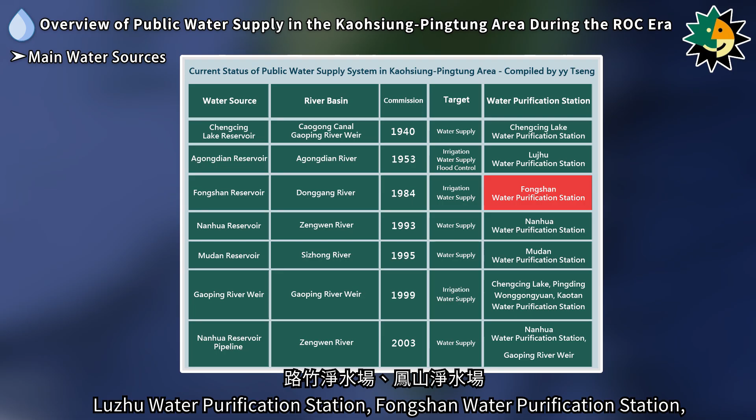The main water sources for water purification stations in the Kaohsiung area come from Chengcing Lake Reservoir, Agongdian Reservoir, Fongshan Reservoir, Nanhua Reservoir, and the Gaoping River Weir. These sources provide raw water to Chengcing Lake Water Purification Station, Lujhu Water Purification Station, Fongshan Water Purification Station, Pingding Water Purification Station, Wonggongyuan Water Purification Station, and Kaotan Water Purification Station to supply municipal and industrial water for the Kaohsiung area.

In the Pingtung area, public water supply in northern Pingtung is mainly provided by the Pingtung Water Purification Station, which utilizes groundwater to meet the water needs of the region. In southern Pingtung, the Mudan Water Purification Station, using both Mudan Reservoir and groundwater, supplies the water demands of the southern region.

Additionally, due to the significant rainfall differences between the wet and dry seasons in southern Taiwan, a pipeline connecting the Nanhua Reservoir and the Gaoping River Weir was completed in 2003 to stabilize water supply from the weir, with a designed supply capacity of 800,000 cubic meters per day.

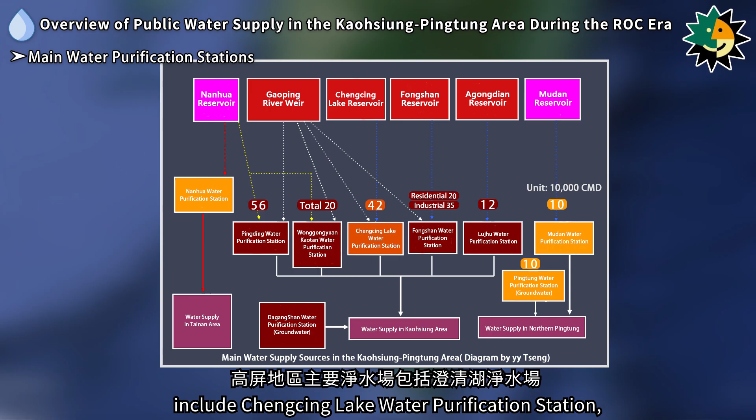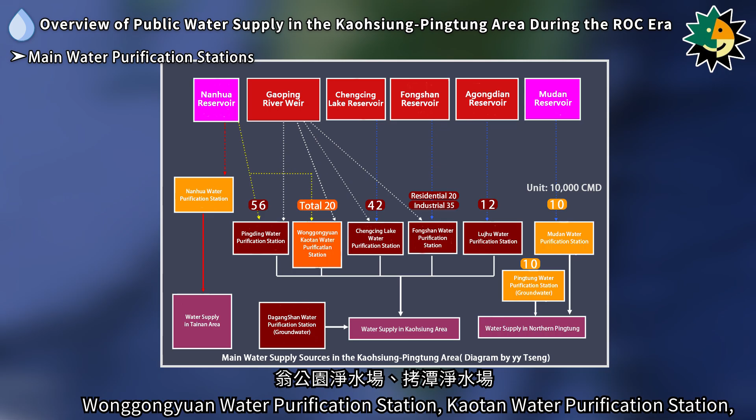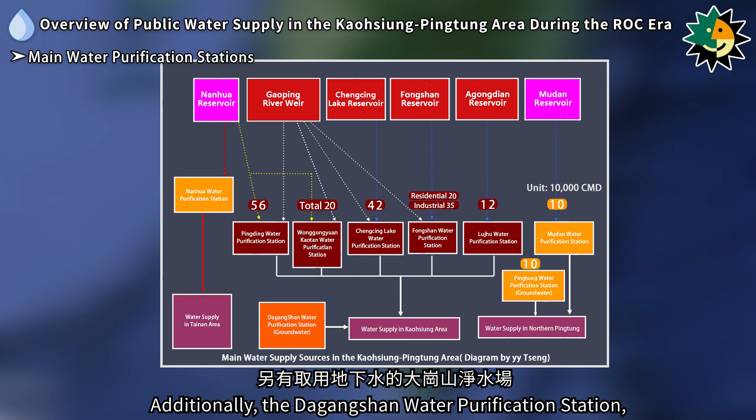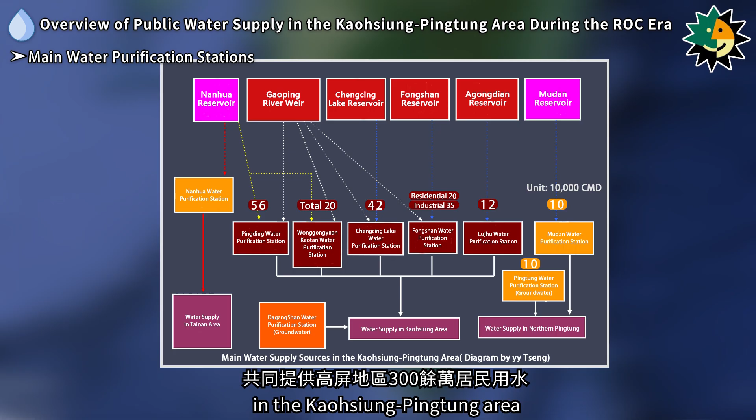The main water purification stations in the Kaohsiung-Pingtung area include Chengcing Lake Water Purification Station, Lujhu Water Purification Station, Fongshan Water Purification Station, Pingding Water Purification Station, Wonggongyuan Water Purification Station, Kaotan Water Purification Station, Mudan Water Purification Station, and Pingtung Water Purification Station. Additionally, the Dagangshan Water Purification Station, which uses groundwater, also contributes to supplying water to more than 3 million residents in the Kaohsiung-Pingtung area. Kaohsiung alone has a water-consuming population of approximately 2.6 million people.

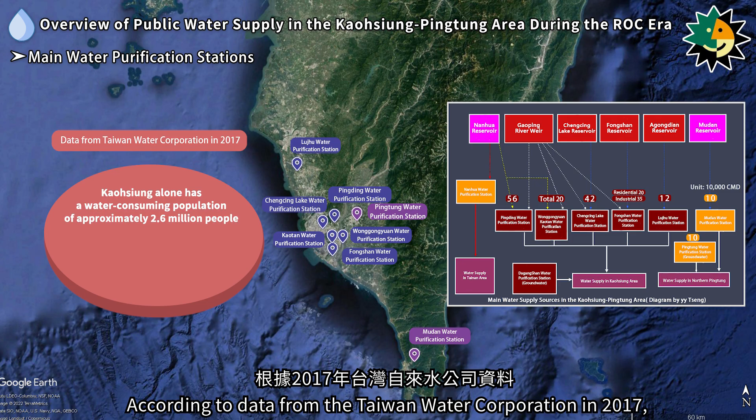According to data from the Taiwan Water Corporation in 2017, the total output of the Kaohsiung water supply system was about 1.99 million cubic meters per day, including 560,000 cubic meters per day from Pingding Water Purification Station, 420,000 cubic meters per day from Chengcing Lake Water Purification Station, 200,000 cubic meters per day for municipal water, and 350,000 cubic meters per day for industrial water from Fongshan Water Purification Station,

170,000 cubic meters per day from Kaotan Water Purification Station, 120,000 cubic meters per day from Lujhu Water Purification Station, 30,000 cubic meters per day from Wonggongyuan Water Purification Station, and 140,000 cubic meters per day from other stations.

In the Pingtung area, which has a population of about 600,000 people, the total output of the water supply system is approximately 200,000 cubic meters per day. The Pingtung Water Purification Station provides 100,000 cubic meters per day from groundwater, while the Mudan Water Purification Station provides another 100,000 cubic meters per day from Mudan Reservoir and groundwater.

Chengcing Lake, originally named Dapi, is located in Niaosong District, Kaohsiung City. During the Japanese colonial period, water was drawn from the Gaoping River, and through the Caogong Canal, it was diverted into Chengcing Lake Reservoir to supply industrial water to the Sishihjia area of Kaohsiung. The daily water output was less than 10,000 cubic meters per day.

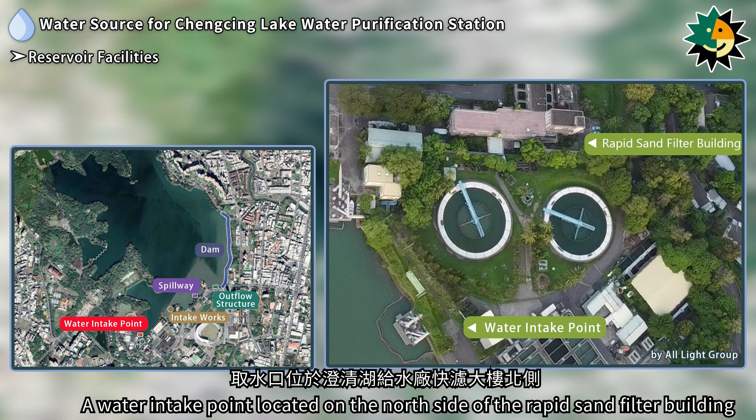The main facilities of Chengcing Lake Reservoir include an earthen dam with a crest height of 19 meters, a free overflow spillway with a maximum discharge capacity of 7.7 cubic meters per second, a water intake point located on the north side of the rapid sand filter building at the Chengcing Lake Water Treatment Plant, drawing water through a 0.6 meter diameter pipeline to the purification station.

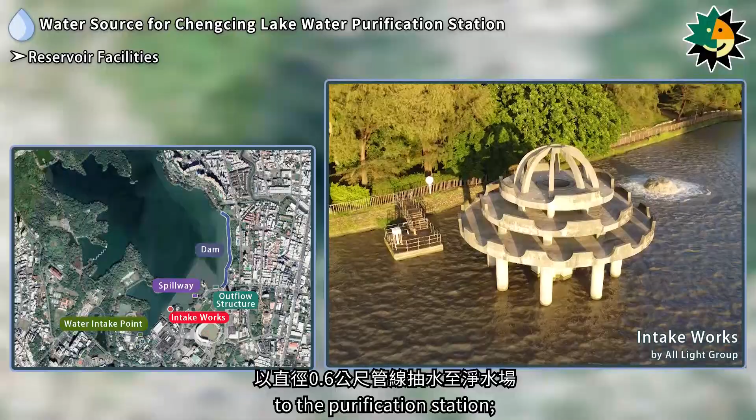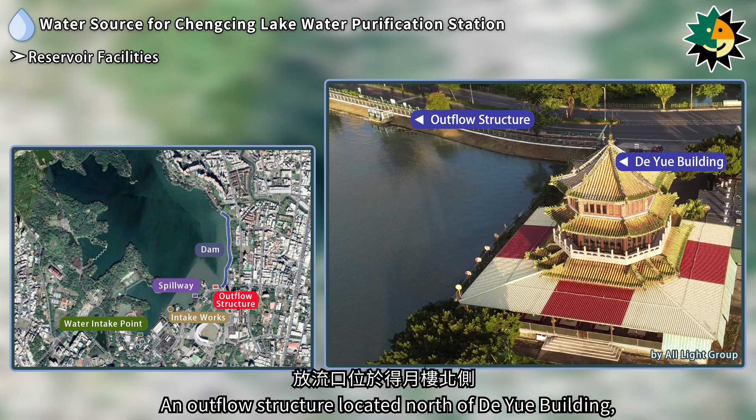Intake works on the north side of the Advanced Water Purification Plant, drawing water from the Gaoping River Weir. An outflow structure located north of De Yue Building, equipped with a lift gate, with a maximum discharge capacity of 11.56 cubic meters per second.

Chengcing Lake enjoys excellent natural conditions and well-maintained soil and water conservation. Its picturesque scenery of lakes and mountains has attracted tourists since 1955, earning it the reputation of being Taiwan's premier scenic spot.

The Chengcing Lake Water Purification Station, located in Niaosong District, was originally established to meet the demand for industrial water during the Japanese colonial period. It was known as the Kaohsiung Industrial Water Treatment Plant, the first water plant in Taiwan specifically set up for industrial water supply. After the war, it was renamed the Kaohsiung Industrial Water Supply Engineering Office in 1947, and its machinery was repaired to resume water supply.

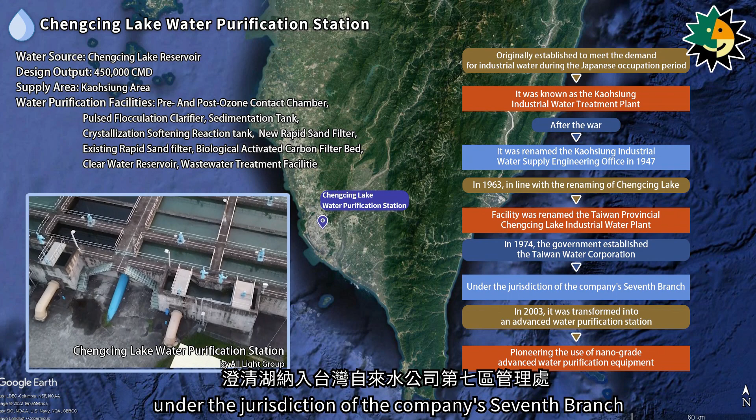In 1963, in line with the renaming of Chengcing Lake, the facility was renamed the Taiwan Provincial Chengcing Lake Industrial Water Plant. In 1974, the government established the Taiwan Water Corporation, and Chengcing Lake was placed under the jurisdiction of the company's 7th branch.

In 2003, it was transformed into an advanced water purification plant, pioneering the use of nano-grade advanced water purification equipment. The water source is drawn from the Gaoping River Weir, with water pumped into Chengcing Lake Reservoir. The station has a designed output of 450,000 cubic meters per day.

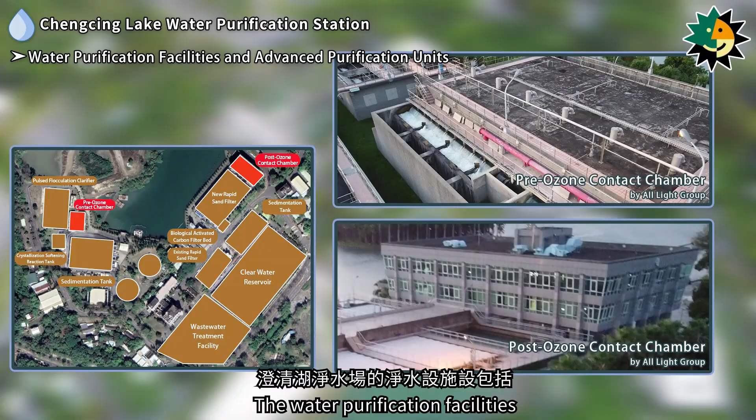The water purification facilities at Chengcing Lake Water Purification Station include pre- and post-ozone contact chambers, pulsed flocculation clarifier, sedimentation tanks, crystallization softening reaction tanks, new rapid sand filters, existing rapid sand filters, biological activated carbon filter beds, clear water reservoirs, and wastewater treatment facilities.

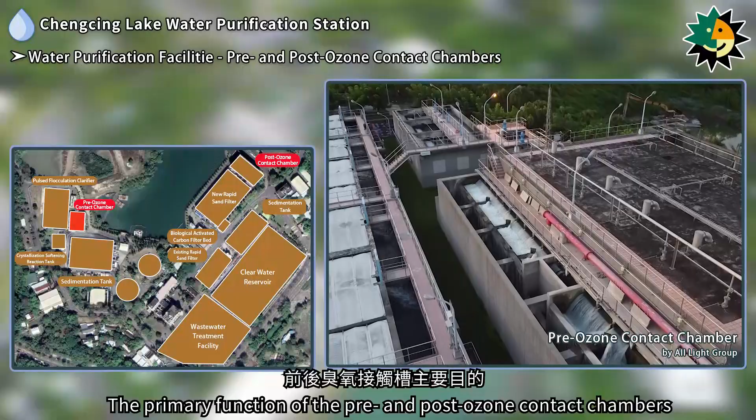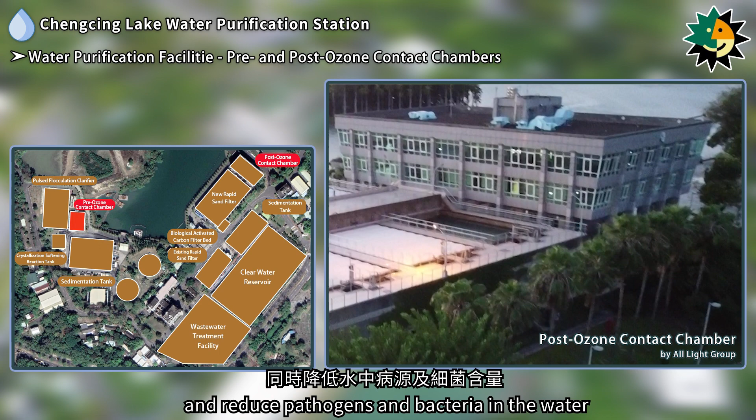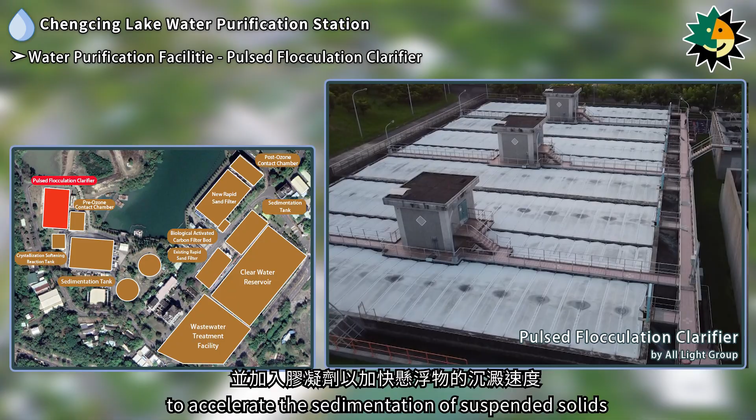The primary function of the pre- and post-ozone contact chambers is to oxidize and remove manganese from the water, inhibit the growth of algae, enhance and improve sedimentation rates, and reduce pathogens and bacteria in the water. The newly installed pulsed flocculation clarifier uses gravity to slowly settle suspended solids in the raw water. Coagulants are added to accelerate the sedimentation of suspended solids.

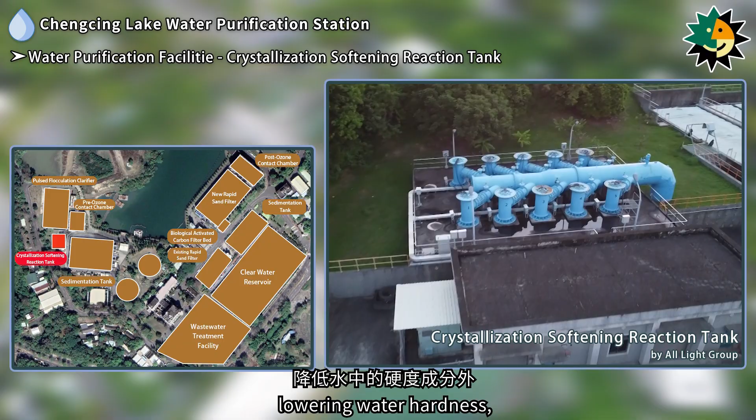The crystallization softening reaction tank reduces the hardness of tap water by removing calcium and magnesium, lowering water hardness, reducing equipment wear during heating, and enhancing the effectiveness of detergents, thereby reducing detergent use.

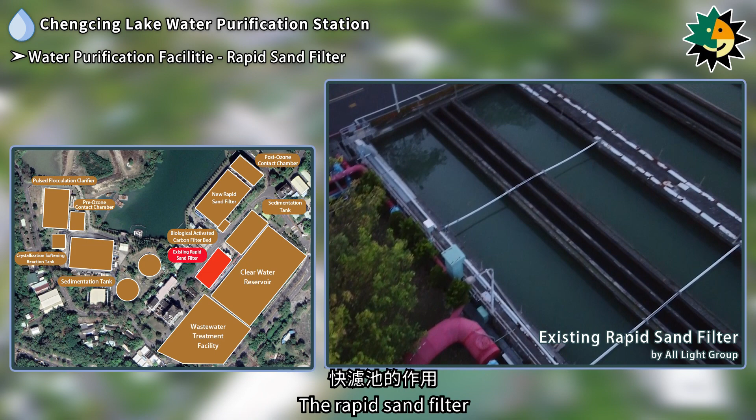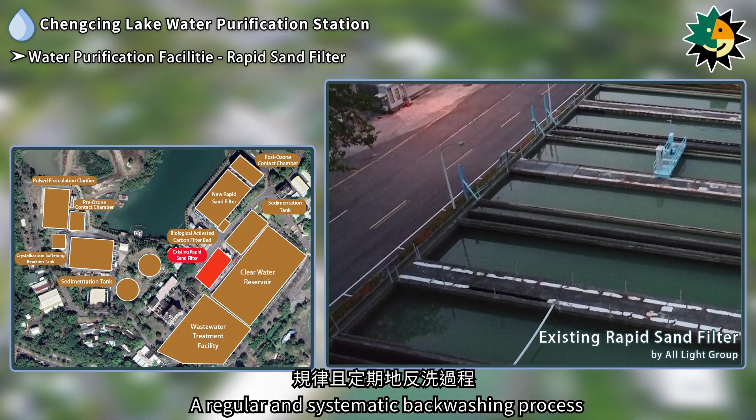The rapid sand filter removes suspended particles from the water. The principle involves using filter materials within the tank, which consist of layers of anthracite and quartz sand. A regular and systematic backwashing process removes suspended particles from the water. The biological activated carbon filter bed is mainly used to remove residual pesticides, reduce carcinogenic substances, and eliminate microscopic bacteria from the water.

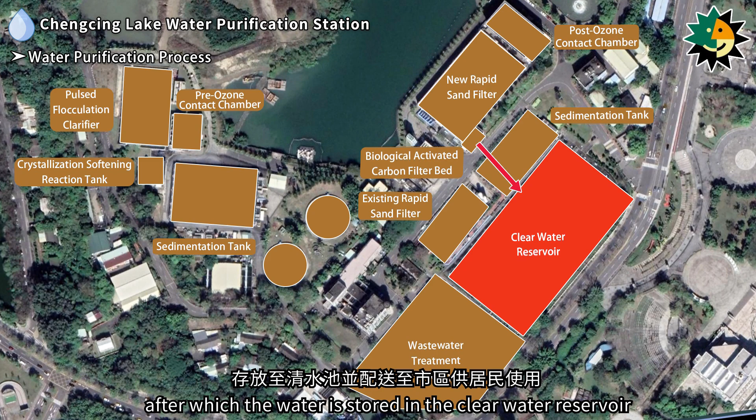The water purification process at Chengcing Lake Water Purification Station starts with drawing water from Chengcing Lake. After passing through the pre-ozone contact chamber, the water enters the flocculation clarifier and crystallization softening reaction tank to clarify the water. The clarified water is then sent to the rapid sand filters for filtration. Finally, residual materials in the water are removed by the biological activated carbon filter bed, after which the water is stored in the clear water reservoir and distributed to urban areas for public use. Chengcing Lake Water Purification Station primarily supplies public water to the greater Kaohsiung area.

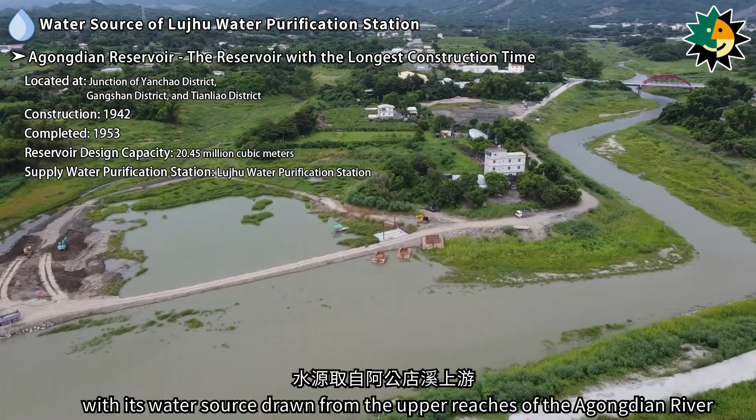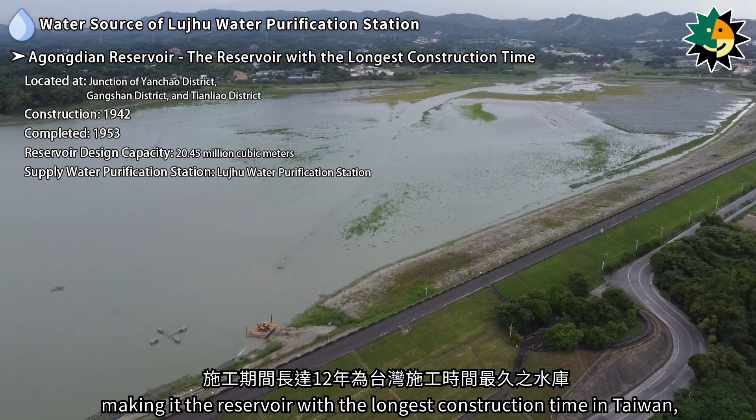Agongdian Reservoir is located at the junction of Yanchao District, Gangshan District, and Tianliao District in Kaohsiung City, with its water source drawn from the upper reaches of the Agongdian River. Construction began during the Japanese colonial period in 1942 and was completed in 1953, making it the reservoir with the longest construction time in Taiwan, spanning 12 years.

Agongdian Reservoir is also Taiwan's only multi-purpose reservoir that prioritizes flood control while also serving agricultural irrigation and public water supply. The designed water intake capacity of Agongdian Reservoir for public water supply is 20.45 million cubic meters. However, due to severe siltation and pollution in the watershed, the reservoir temporarily ceased public water supply. In late 2005, water storage was restored, and the reservoir was reopened in June 2006, with its main function being to provide water for the Lujhu Water Purification Station.

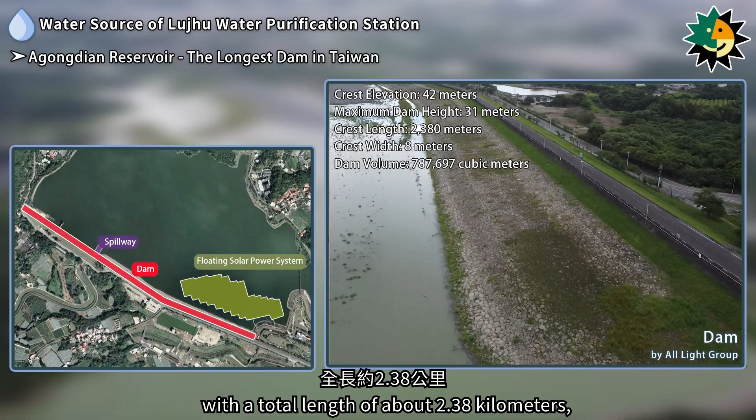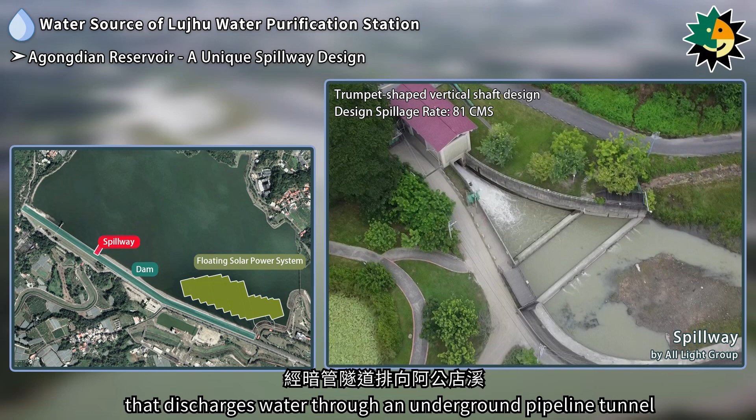The dam of Agongdian Reservoir is a rolled-fill earthen dam with a total length of about 2.38 kilometers, once the longest in the Far East, and remains the longest dam in Taiwan. The spillway of Agongdian Reservoir features a trumpet-shaped vertical shaft design, with the spillway utilizing a patio-type vortex outlet that discharges water through an underground pipeline tunnel to the Agongdian River. The distinctive trumpet-shaped structure protruding from the water is a notable feature. To align with the government's 2025 nuclear-free homeland energy policy, a floating solar power system has been installed in the reservoir area of Agongdian Reservoir.

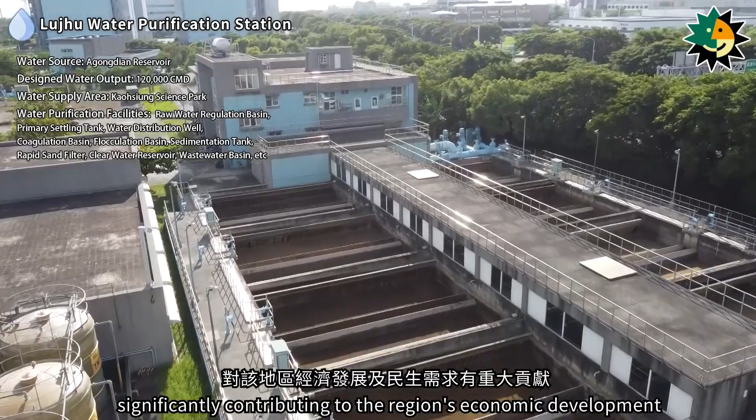The Lujhu Water Purification Station was constructed in 2008, drawing its water source from the Agongdian Reservoir, with a designed output capacity of 120,000 cubic meters per day. The station primarily addresses the water needs of the Kaohsiung Science Park of the Southern Taiwan Science Park. When there is surplus water, it is coordinated with excess water from the Nanhua Reservoir to meet the municipal water demands of nearby townships. The Lujhu Water Purification Station is one of the most important stations in northern Kaohsiung, significantly contributing to the region's economic development and meeting public water needs.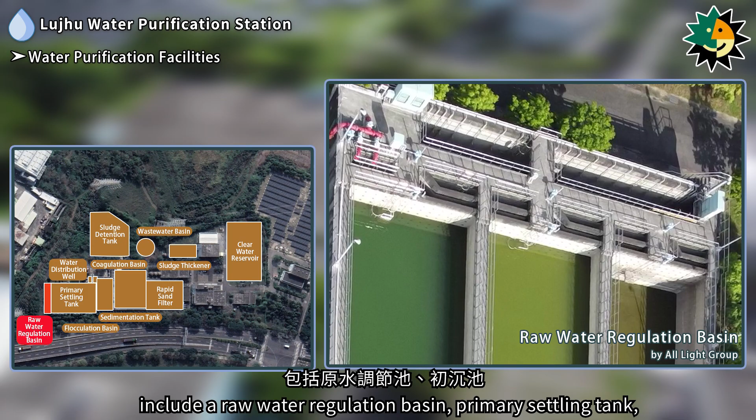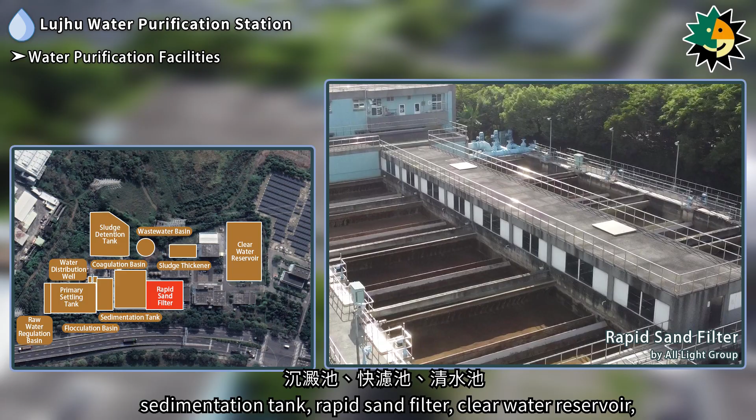The water purification facilities at Lujhu Water Purification Station include a raw water regulation basin, primary settling tank, water distribution well, coagulation basin, flocculation basin, sedimentation tank, rapid sand filter, clear water reservoir, wastewater basin, sludge thickener, and sludge detention tank.

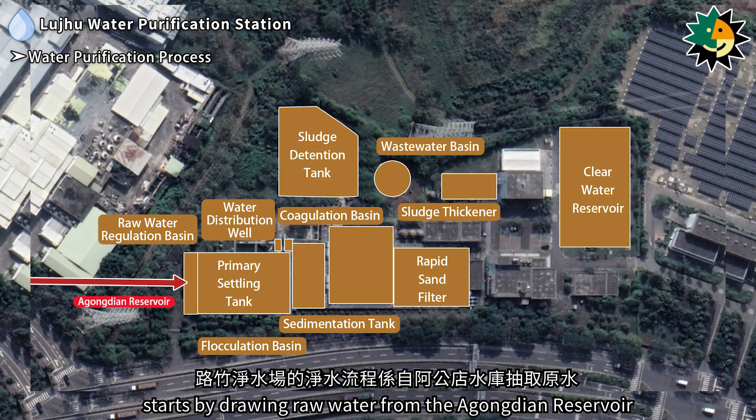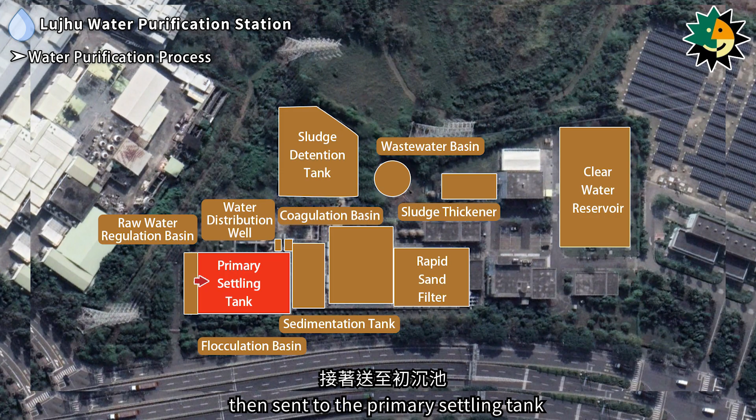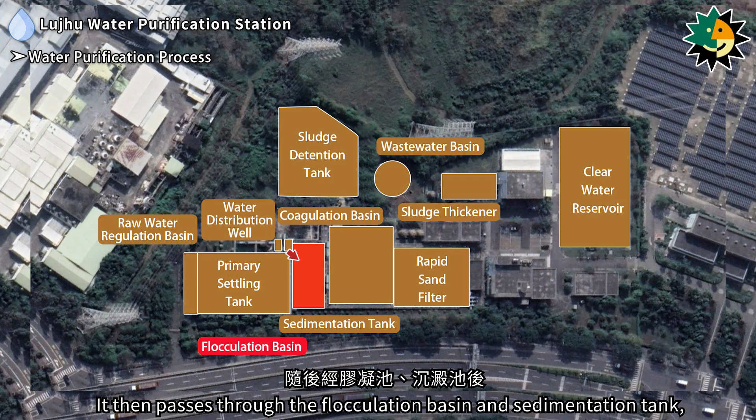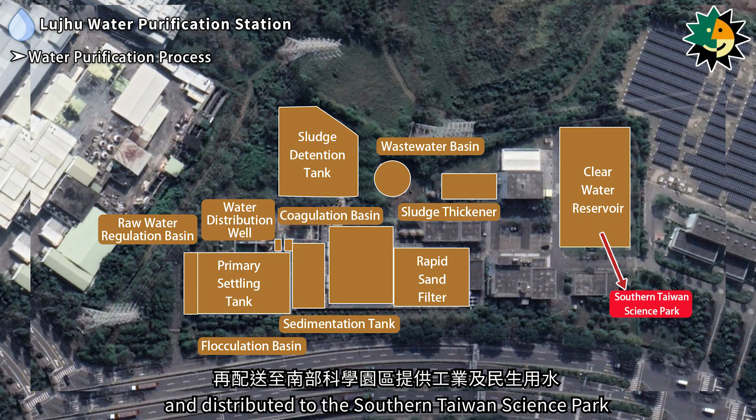The water purification process at Lujhu Water Purification Station starts by drawing raw water from the Agongdian Reservoir. The water is conveyed through pipelines to the raw water regulation basin at the station for regulation, then sent to the primary settling tank. After sedimentation, the water is directed through the water distribution well to the coagulation basin for treatment. It then passes through the flocculation basin and sedimentation tank, followed by filtration through the rapid sand filter. The purified water is stored in the clear water reservoir and distributed to the Southern Taiwan Science Park to provide both industrial and municipal water.

In the early stages, the water source for municipal use at Fongshan Water Purification Station came from the Gaoping River, with water drawn from the Gaoping River Weir pumping station and sent to the Fongshan Water Purification Station via the Zhaoming Pumping Station.

The Fongshan Reservoir is the most important source of industrial water supply for the greater Kaohsiung area. It was completed and opened in June 1982. Approximately 3/4 of the reservoir is located in Xiaogang District, Kaohsiung City, with the remainder in Linyuan District, and the main gate located in Daliao District.

The dam site is located at the southeastern foothills of the Fongshan Hills, at the junction of Xiaogang, Linyuan, and Daliao districts in Linyai village. The reservoir is named after Fongshan due to its location. It is an off-stream reservoir with water sources from Donggang River and Gaoping River through Trans-Basin Water Diversion.

The reservoir covers an area of 74.9 hectares, with a storage capacity of 8.7 million cubic meters, primarily providing water for the Fongshan Water Purification Station.

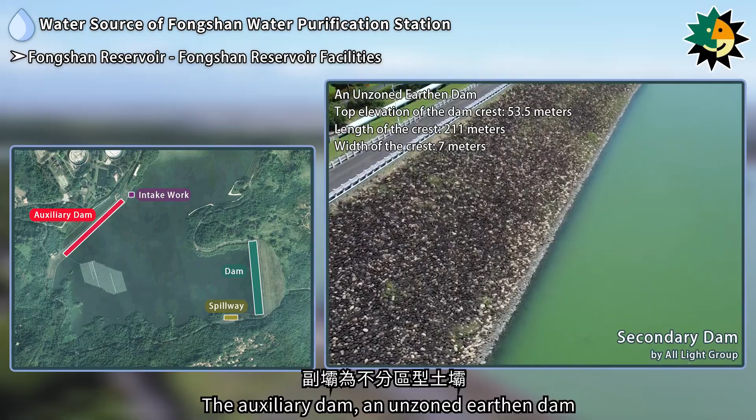The main facilities of Fongshan Reservoir include the Donggang River Weir, which is a floating overflow weir, the main dam, which is a layered rolled fill and zoned earthen dam, the auxiliary dam, an unzoned earthen dam, the spillway, which is a side channel overflow type without gates, and the intake works, which uses a nearshore inclined chute type sliding gate.

Fongshan Water Purification Station was constructed in 1977 in 2 phases. The first phase, the Municipal Water Treatment System, began construction in October 1977 and was completed in May 1980. The second phase, the Industrial Water Treatment System, was completed in June 1985, and advanced water purification processes were added in 2004.

Due to the instability of the Gaoping River's water, Donggang River was originally used only for industrial water supply. In 2014, a pre-treatment project was implemented for Donggang River's raw water, creating biological filters to purify ammonia, nitrogen, and organic materials in the water.

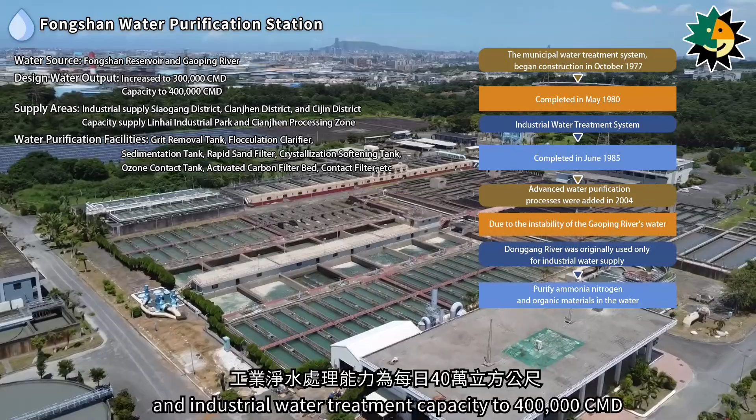After treatment, the raw water is further purified at the water purification station and can then be supplied as municipal water. After the expansion of the Fongshan Water Purification Station, its capacity for municipal water treatment increased to 300,000 cubic meters per day, and industrial water treatment capacity to 400,000 cubic meters per day.

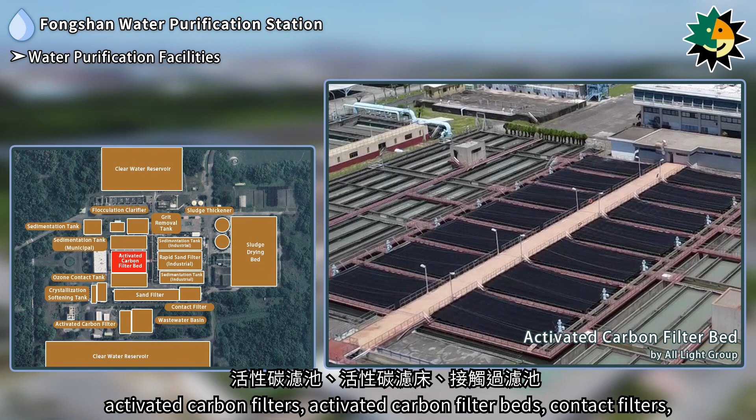The water purification facilities at Fongshan Water Purification Station include grit removal tanks, flocculation clarifiers, sedimentation tanks, rapid sand filters, crystallization softening tanks, ozone contact tanks, activated carbon filters, activated carbon filter beds, contact filters, clear water reservoirs, sand filters, wastewater basins, sludge thickeners, and sludge drying beds.

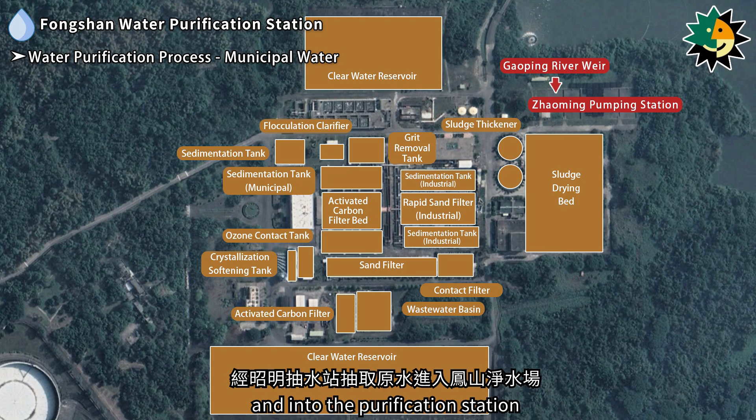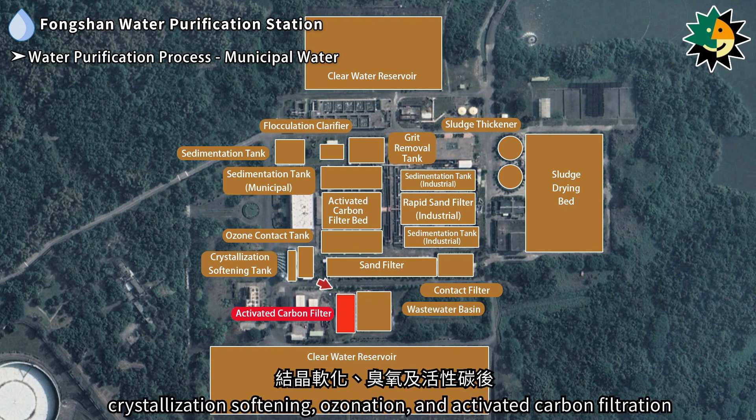The municipal water purification process at Fongshan Water Purification Station involves drawing raw water from the Gaoping River Weir, which is pumped through the Zhaoming Pumping Station and into the purification station. The water undergoes grit removal, flocculation and sedimentation, crystallization softening, ozonation, and activated carbon filtration. After chlorination, the water is stored in the Clear Water Reservoir and distributed to Siaogang District, Cianjhen District, and Cijin District for residential use.

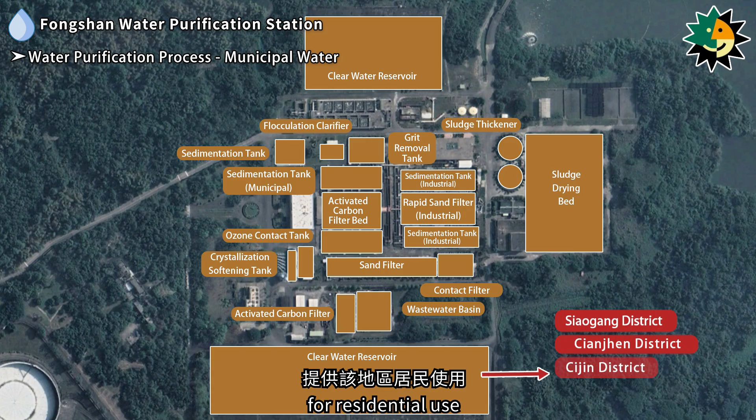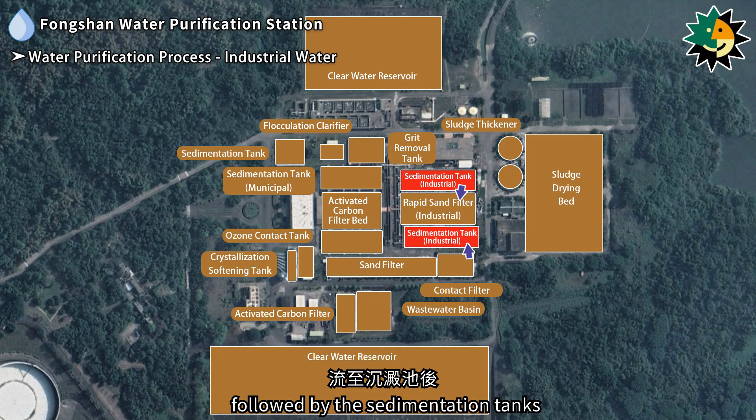The industrial water purification process at Fongshan Water Purification Station starts with raw industrial water sourced from the Donggang River. The water is first stored in Fongshan Reservoir and then pumped to the contact filters, followed by the sedimentation tanks. After being filtered through the rapid sand filters, the purified water is stored in the Clear Water Reservoir. The water is then distributed by gravity to the Linhai Industrial Park and Cianjhen Processing Zone to meet the industrial water needs of these areas.

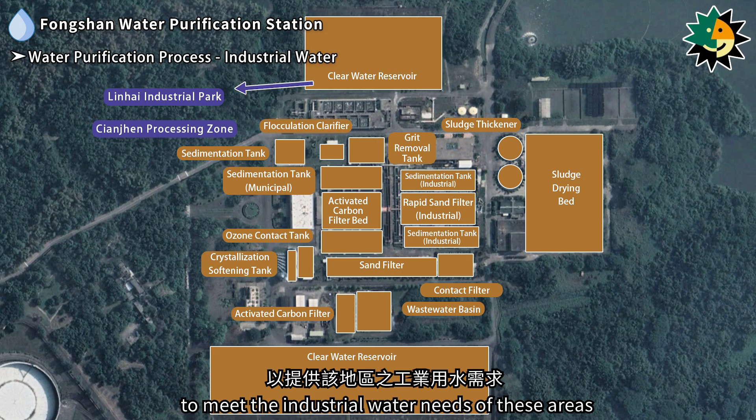The public water supply in the Kaohsiung area is primarily sourced from Chengcing Lake Reservoir, Agongdian Reservoir, Fongshan Reservoir, the Gaoping River Weir, and Nanhua Reservoir.

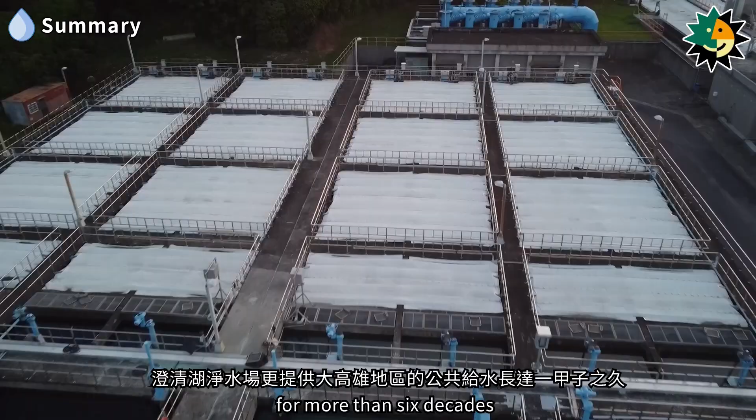Since the completion of Chengcing Lake, not only has its picturesque scenery attracted numerous tourists, but the Chengcing Lake Water Purification Station has also provided public water to the greater Kaohsiung area for more than 6 decades. During this time, the purification station has continuously expanded its advanced water purification units, ensuring the supply of high-quality municipal water for the region.

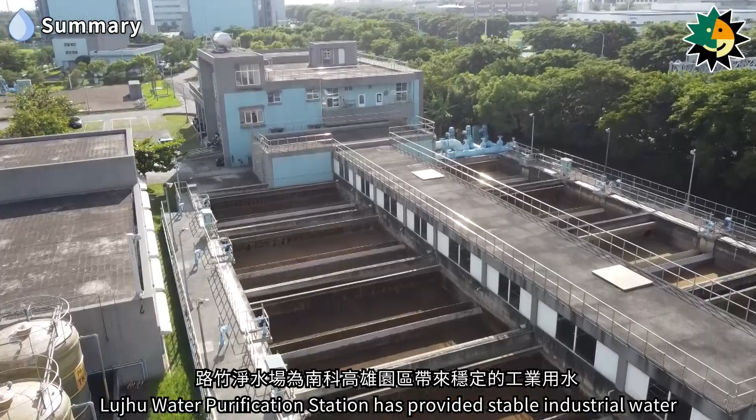Lujhu Water Purification Station has provided stable industrial water to the Kaohsiung Science Park of the Southern Taiwan Science Park, fostering the growth of the technology sector. Meanwhile, Fongshan Water Purification Station plays a critical role in meeting both the municipal and industrial water needs of the area. In the next episode, we will introduce other key water sources in the Kaohsiung-Pingtung area, including the Gaoping River Weir.